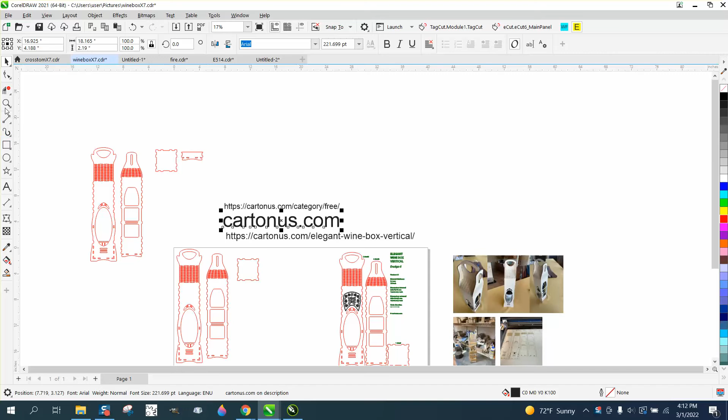It goes together really easy, and I explain a couple more things in it. But if you wanted to make it your own, I think you get 6 files of different shapes. This one's got kind of a rounded edge, but that doesn't really matter.

We can go here and take the virtual segment delete key and just swipe through there and get rid of some of these interior lines. Just make sure you don't do anything to the outside.

You can do the same thing. Whenever you get into a point like that, it just won't work. Go up to Object and ungroup it and see if you can't cut that line now.

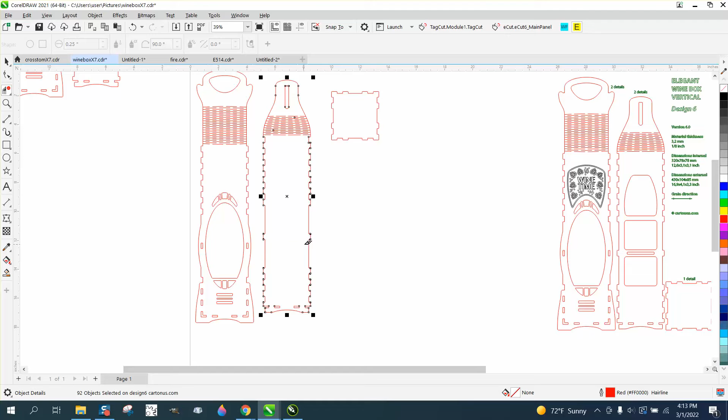And we did. Now I'm going to do the same thing to this one. We could actually go up to Object and ungroup it, then just select all these interior parts and delete them. You don't need all this stuff.

Then what I would do is take this object - now we've kind of messed it up, but if you group it back together with Control G, I'm going to rotate it 90 degrees, because to me it'd be a lot easier to embellish, and you could do anything.

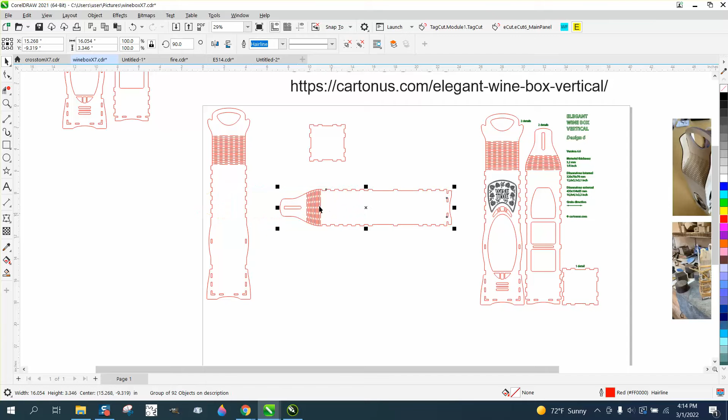You could engrave on it - when you get the file, this is going to come, and this is pretty good. This is vector engraving. These are hairlines, so you would just do it lightly, but you could do a lot of things with it.

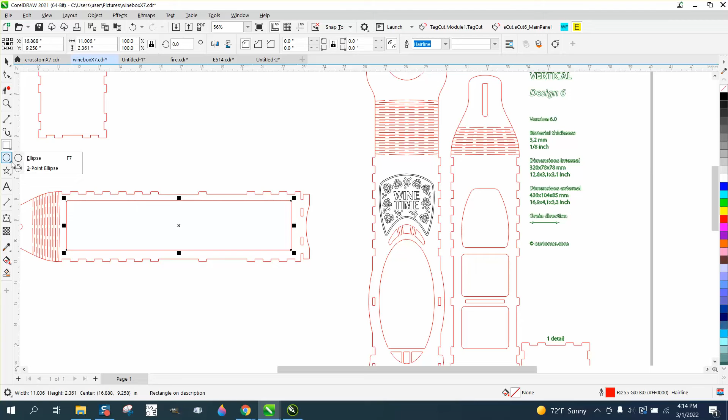You could take a box, and I'm just throwing out some suggestions here, take an ellipse and go like this, maybe Control D and make a duplicate, make that box bigger, then Control D, Control D, Control D, and just kind of play around with that, imagining that we don't want any of these lines, and make sure you get them all, even though there's going to be some little bitty fracture lines there.

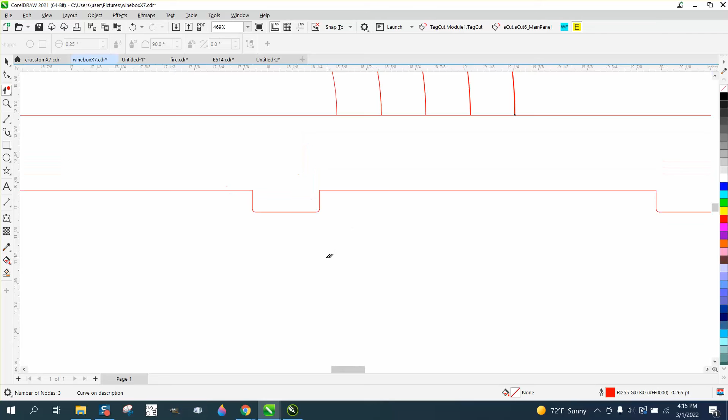Then you need to think about the solid box. We're going to go ahead and take away this, and then take away every other line, and actually delete that line, delete that. When you do, now your new item is going to have a design in it.

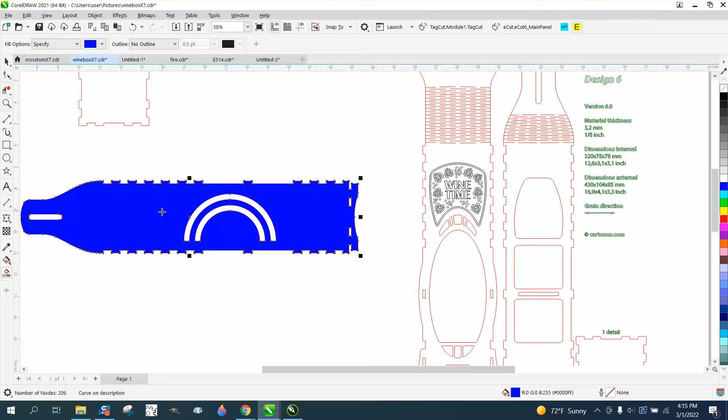If we take the Smart Fill tool, it's not going to work really well on the living hinge, but you see what you're going to get - that's going to be see-through in your box. This is the kind of stuff I really like doing.

You could actually take that design, Control D, and mirror it, then grab it all and possibly see what happens if we weld it. Didn't work, but we could try back minus front, front minus back. So it's not going to really work in this case.

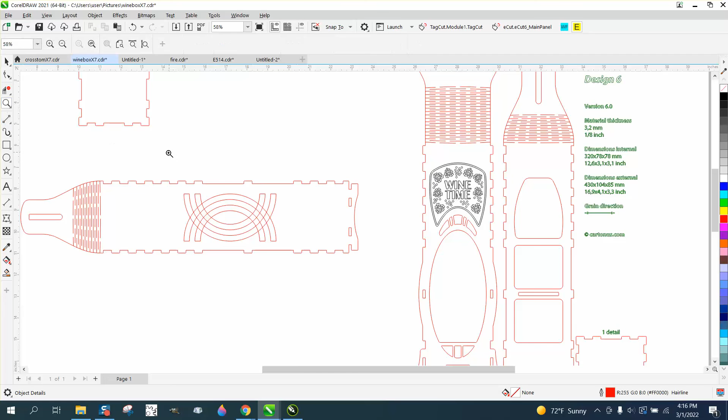So you're going to have to use the virtual segment delete key. I do not think the intersect tool is going to work. Nope. But to make this work, all you have to do is just take your virtual segment delete key.

Delete these lines and have a pattern go through it. You've just got to be thinking about every red line it's going to cut, so you don't want it to cut double, and just kind of use your imagination.

If you use the Alt key, you can draw in a line and do stuff like that. I think I've got a little bit of it. Nope, everything's good. Then just do the same thing to this line.

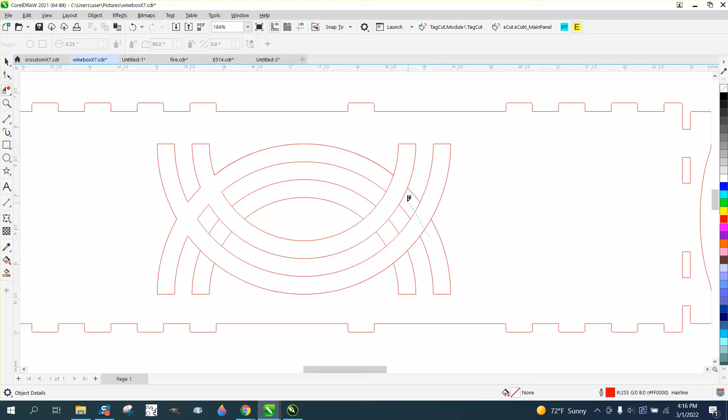I'm going to hold down the Alt key and just stretch through there, hold down the Alt key and stretch through here, stretch through here, stretch through here. Now that's all one unit, and it's going to stay in there.

Let's draw a straight line so it does not interfere with the living hinge, but let's take the Smart Fill tool - that's what your design is going to look like. These pieces will be gone.

So everything in blue is going to be gone, everything in white is going to stay there. If you kind of look at it like this, take a yellow box, fill it in with yellow.

Go to Object, Order, Back of Page - that's what your design's going to look like. The yellow's going to be gone, the blue's going to be wood. So you could really play around with this and do a lot with it.

And because of the fact that it's like this, you could use this. Let me get all the smart fill out of the way. You could actually Control G to group all that together, and you could have it in there twice.

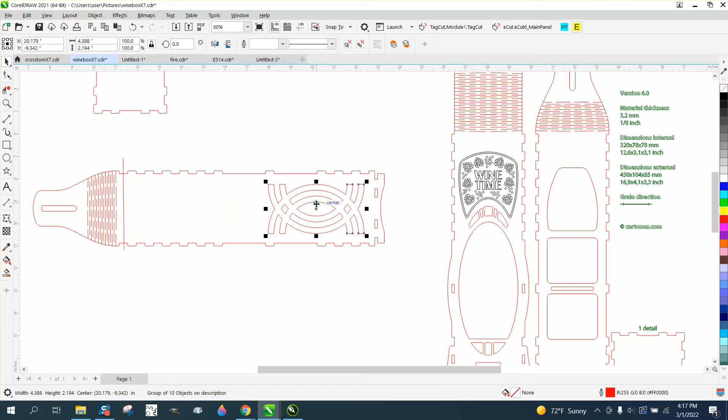Hit the plus key and use the control button. Whenever you use the control button, you need to start moving it first, so you could have that same design in there twice, and do that on both sides or either side, then put the customer's name or anything on there. You could engrave it, you could put grapes on it.